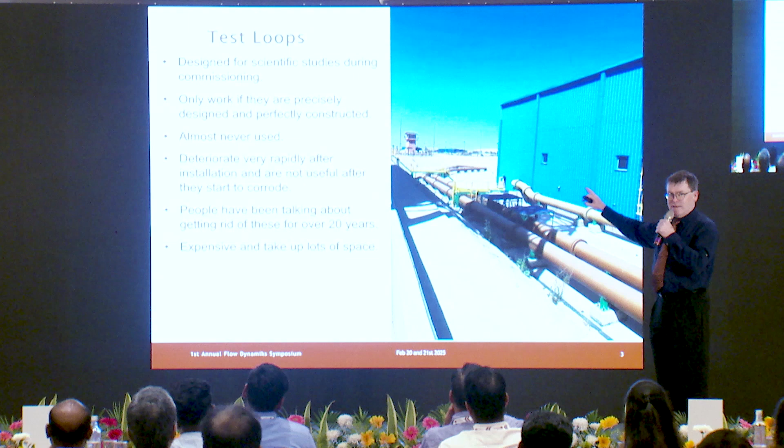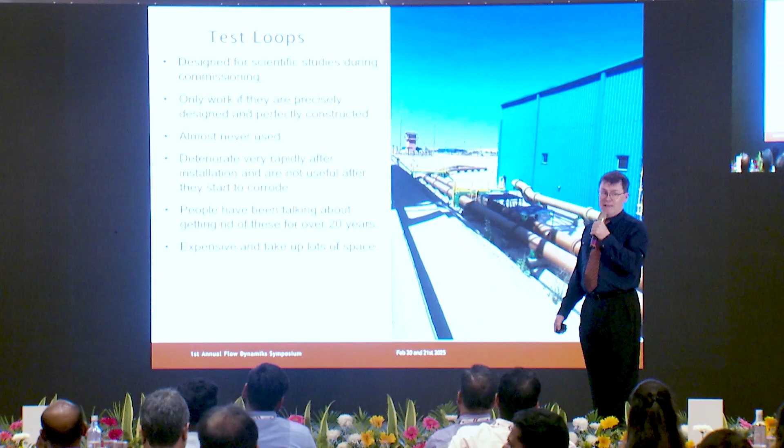The first one is test loops. So as Raj alluded to in his coal pipeline presentation, they spent a huge amount of money on the first coal pipeline to do a lot of studies at different diameters, different grind sizes, different everything. And so the first slurry pipelines, imagine the excitement of those guys if they could install a test loop right next to their pump station so they could test all the different stuff and do their studies and all of that. And that was great, but it seems to have gotten copied and pasted onto everything. So in my entire career, I've only used a test loop once, and the only thing I needed that for was for the sampling point. I've heard stories that maybe they get used a little bit during commissioning.

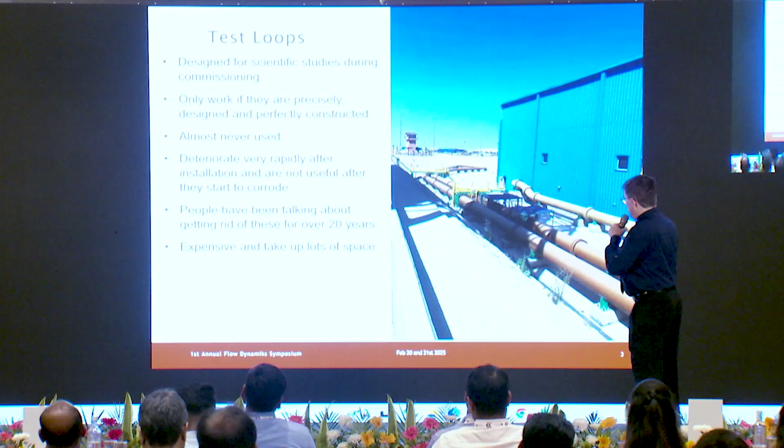So let me just run through the bullet points. So they're primarily just tools for doing a little bit of scientific study, and we've got the science down pretty well at this point. They only work if they're perfect. So I need a perfectly straight piece of pipe, and it needs to be exactly level. If it's not, then I can't use it because you're going to have a slightly different elevation, and it's going to make a problem with all of the differential pressure measurements. They're almost never used. The other problem is that they work fine during commissioning when they're brand new.

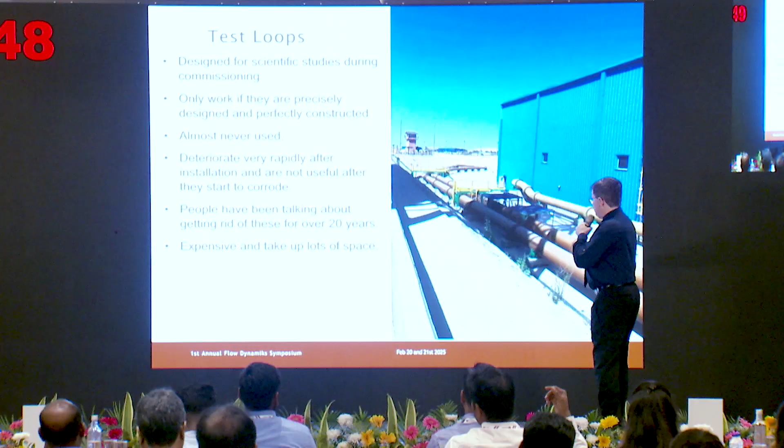The whole idea here is that this pipe is supposed to match your pipeline exactly. And the only time it matches it exactly is on day one. Because no matter what you do, the only way this could work is if you ran the slurry through there.

Do I really only have 8 minutes left?

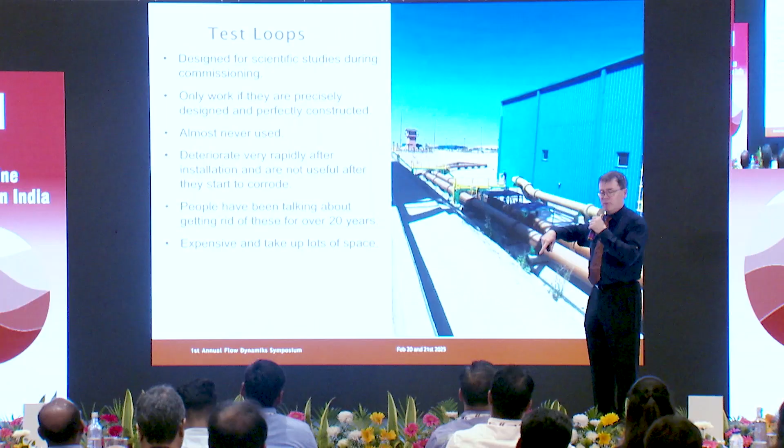Okay, anyway. The only way this could possibly work is if you ran the slurry through there all the time, because that's the only way you're going to get that test loop to wear and corrode at the same rate as your pipeline. So what happens is people use this during commissioning and then they shut it down. They either drain it, or I guess somebody might dry it out and purge it and keep it in pristine condition, but either way it doesn't match your pipeline anymore. So it's a very limited value.

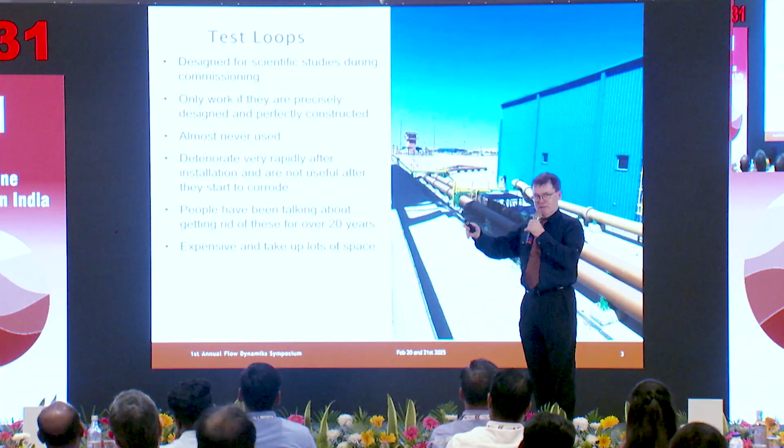And what we've found is that slurry pipelines are a lot more forgiving. Well, I shouldn't say that — we've come up with very specific specifications on slurries so that they are forgiving. We've figured out which aspects of the slurry you can relax on and which ones we have to be very strict about. And so what's happened is we aren't that concerned about off-spec slurry.

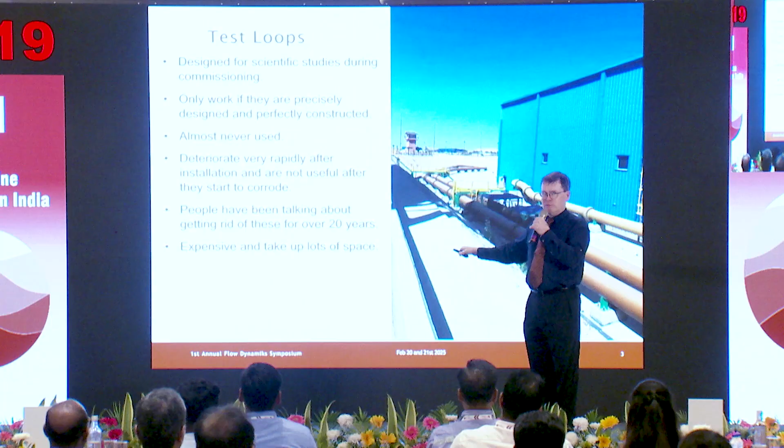We aren't so concerned that we routinely send product to the tailings pond, which I think was the original intention — that you would run it through here and say, oh, that's not going to make it through our pipeline, we're going to send that off and dispose of it or send it back to the grinding mill or something. And that really doesn't happen. I think of all the slurries I've seen, the least likely slurry for that to even happen on would be iron ore, just because of the way it's mined.

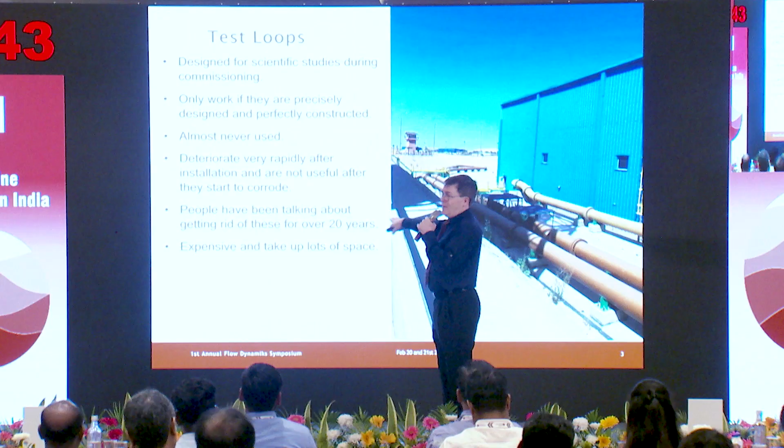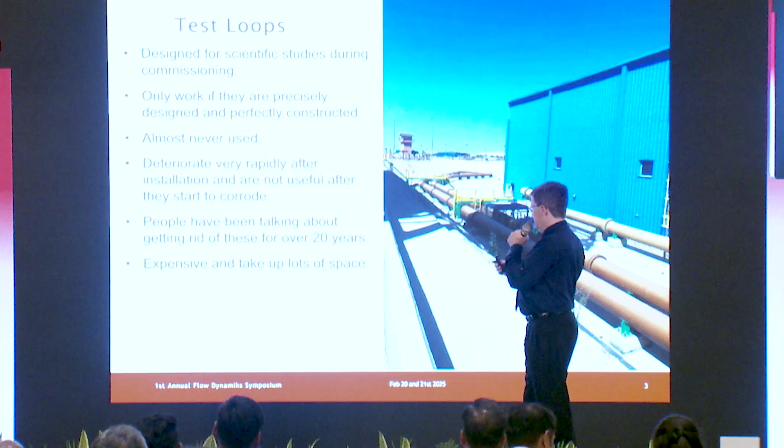When I joined PSI in 2000, there were already people saying we don't need these things. So I personally have never installed one of these on any of my jobs, ever. Now, that's not to say I've run every job that's come out of every slurry engineering company I ever worked with, so these do get installed. But you don't want these — they're expensive and they take up a lot of space. So please, I would rather not have my first test loop be at Flow Dynamiks.

Help me help you — let's not do these. And then I think the next one's really something. I don't know where this one came from: the oxygen scavenger system.

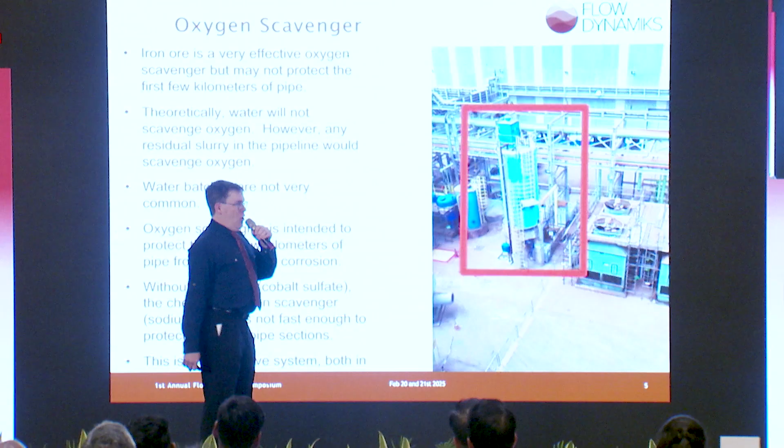We used to study these so much because we would have these copper concentrate pipelines that were almost something we didn't need to put a liner in. Liners are incredibly expensive — it changes your entire way you construct it, and you have to go back in and install it, and then it creates all kinds of other complications. Not to say I won't someday recommend we line a pipeline. But we went through this oxygen scavenger so much.

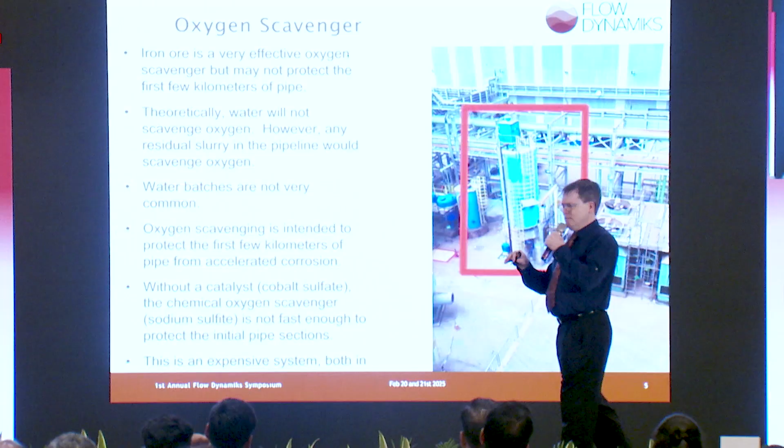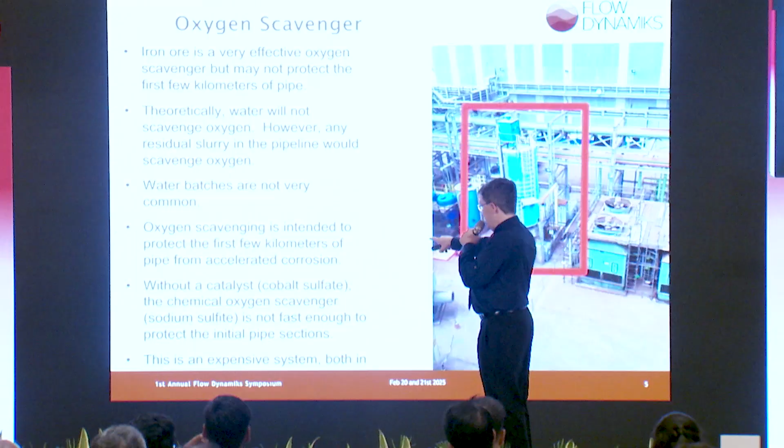The idea is if you can pull the oxygen out, then you have a lower corrosion rate. But the problem is these chemicals are really expensive. We're talking about sodium sulfite, which is the main oxygen scavenger, and then cobalt sulfate you have to add to be a catalyst, because this sodium sulfite does not scavenge the oxygen that rapidly — and all we're concerned about with the oxygen scavenger is maybe the first 5 or 10 kilometers of the pipeline.

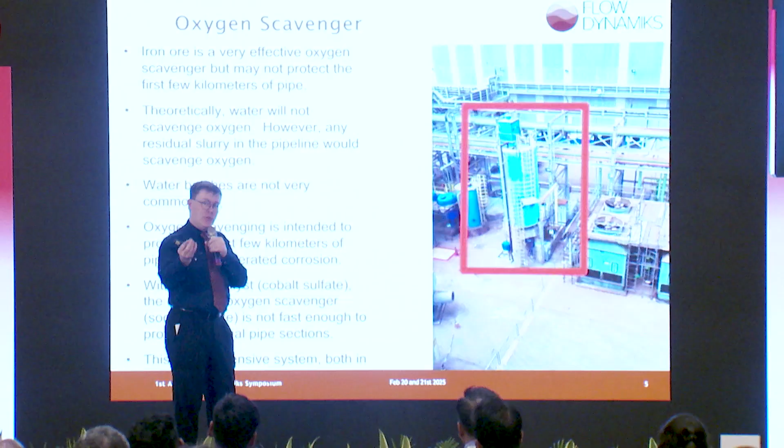The reason that's the case is because any corrosion that takes place is going to automatically scavenge the oxygen — that oxygen will not be in solution. And any iron ore is also going to tend to pull out oxygens because it still has a little bit, it's not fully oxidized in general. There's enough capacity for it to pull out a little bit more oxygen out of there.

So the whole premise behind this was for a different type of material that didn't scavenge oxygen, and it was to add it to the water itself. Now, water, because it doesn't scavenge oxygen, could potentially have a slightly higher corrosion rate than the slurry. It's very unusual, and the effect's not going to be that large.

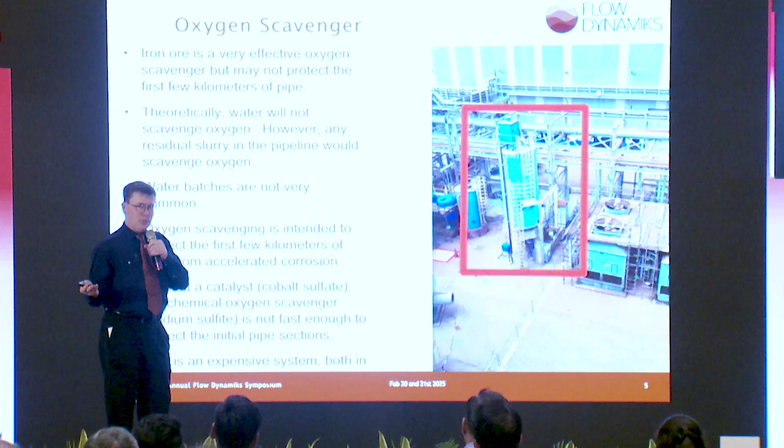But I think that must have been the case when somebody did some corrosion testing. And so the concept became to install this enormous thing — this giant tower full of sodium sulfite, a mix tank, a dosing pump, all of this — only for use on batch water and flush water.

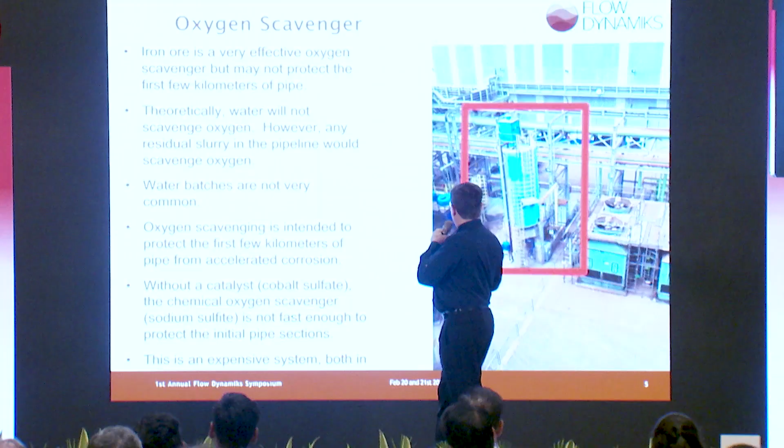And it just doesn't make any sense. I mean, from a technical point of view, I suppose I could continue to copy and paste the same exact thing into people's projects, but it makes no sense. If you really want to go that way, then you need a second tower, mix tank, and dose pump so that I can add the cobalt sulfate, which will obviously be very expensive. You don't need as much of it, but it's more expensive than the sodium sulfite.

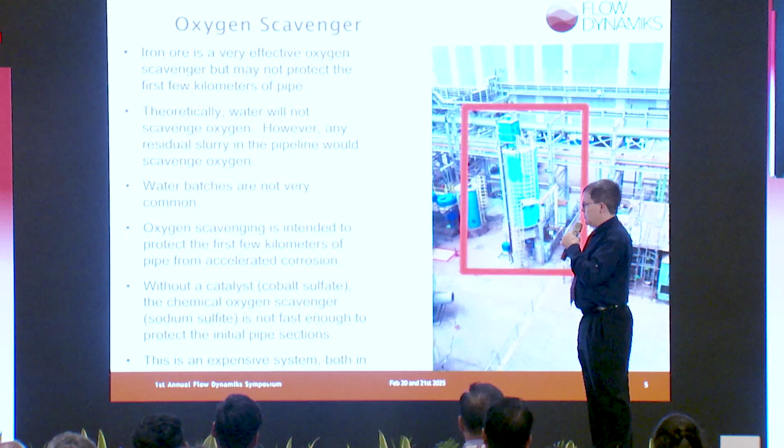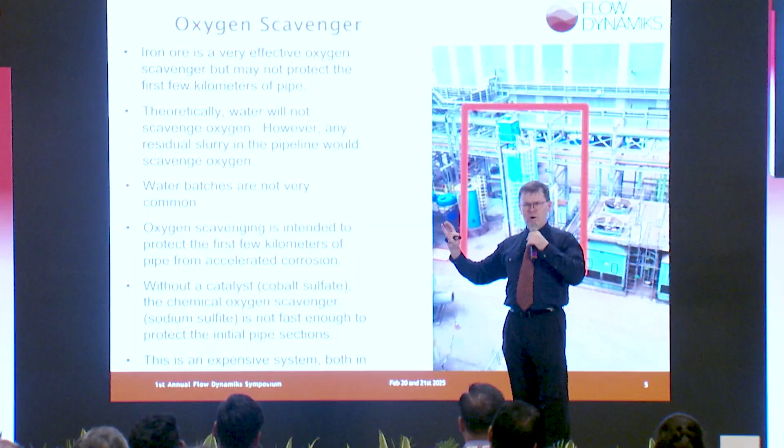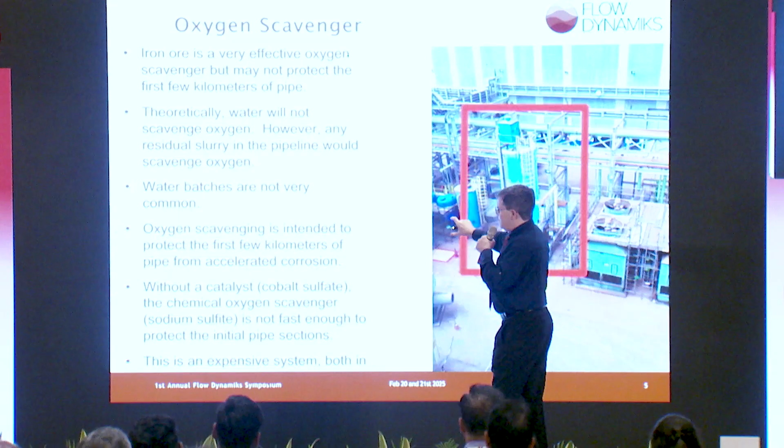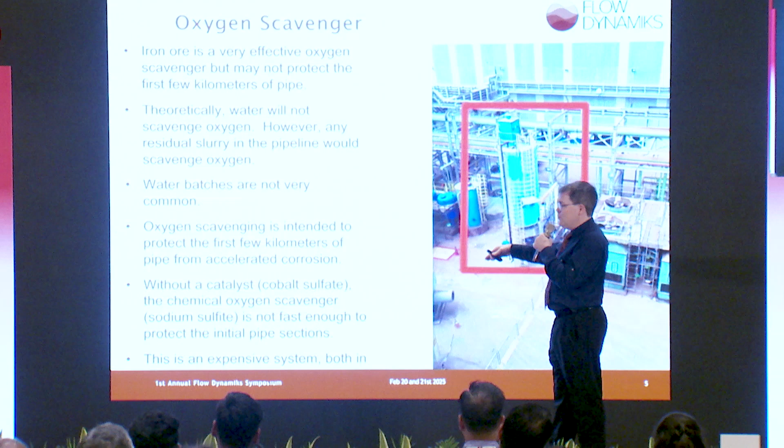So let's just run down the bullet points real quick. You don't need it for iron ore, but the water, you could say you need it for, but there's always going to be enough residual material in that pipeline that you'll have some scavenging ability. The water batches aren't that common, so even if your corrosion rate were something incredible, like 5 times higher on water, you don't run the water batches often enough for the aggregate total to matter that much. You're only trying to protect the first few kilometers of pipeline, and it's not even going to work without the catalyst. This is an expensive system, both because you have to buy all that stuff initially for the capital cost, but also because you're going to need to continually add this material, so it's an operating cost issue as well.

So I want to share a quote: there is nothing so useless as doing efficiently that which should not be done at all. Now I understand everybody wants one of these, but I made these slides up so that when we have meetings about your project, I'm just going to bring this slide. So I don't like these.

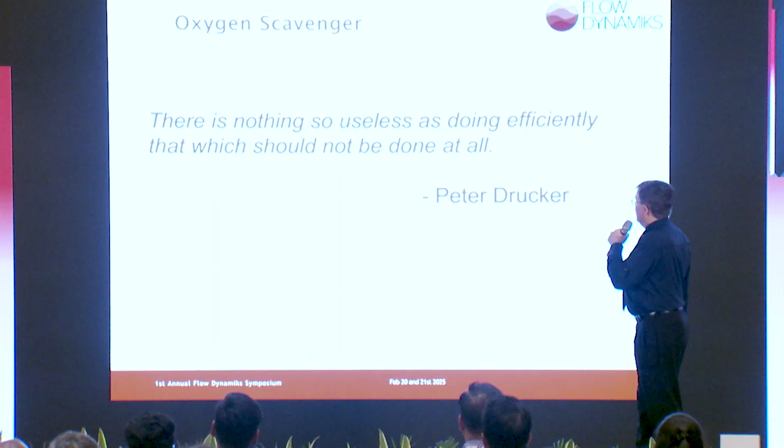So now we're going to move on to things that are a little bit less controversial. These are hydraulic accumulators. We need these to run our high-pressure slurry ball valves, essentially. They don't use motors, they're not electric actuated. We use pressurized hydraulic fluid, so one side is high pressure, one side's low pressure, and that's what turns the valve.

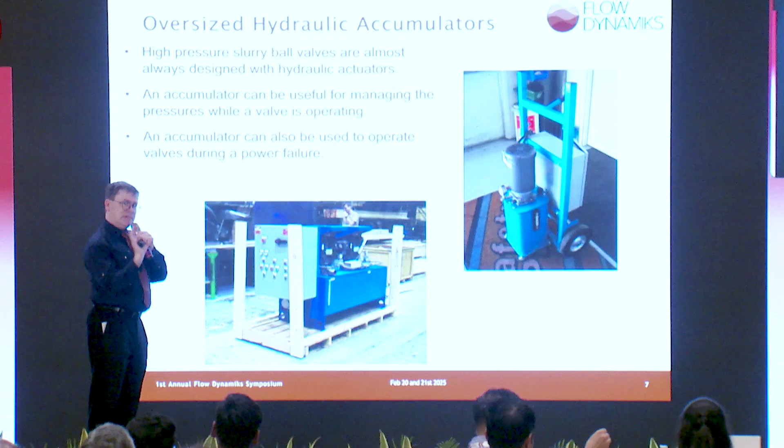The reason we do that is because you can get higher torques that way than with an electric motor. This is an issue because when the valves are sealed, there's a lot of torque required to move them out of that static condition, because you can have 2,000 psi on one side and almost no pressure on the other side. The old plug valves, we would have to inject hydraulic fluid to lift them off their seat so that you could rotate them. These, we don't do that, which is great, but it means you need a very high torque.

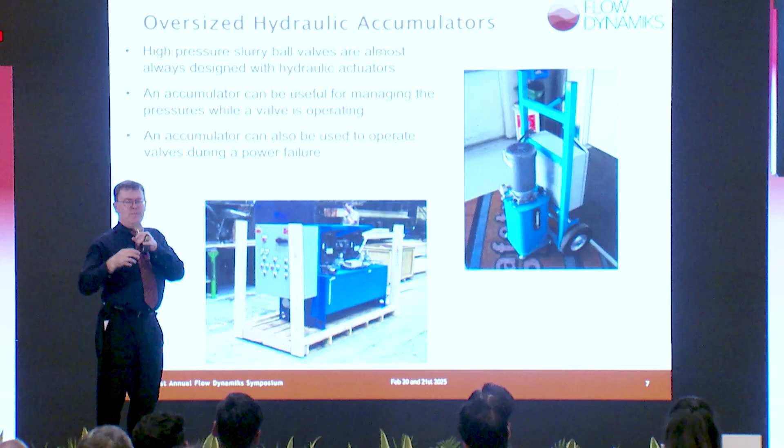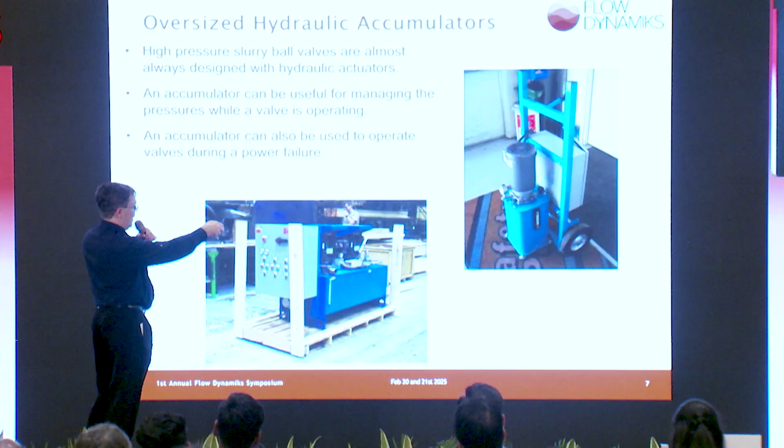In order to get that torque out of something like a motor, you'd need an enormous motor, and then you wouldn't need it after it had first rotated. So that's how these ball valves work. And these are just the hydraulic power side of it. It's got a motor here to run a pump, and then inside there you've got some hydraulic fluid that it then pressurizes, and that's a little bit bigger version of it.

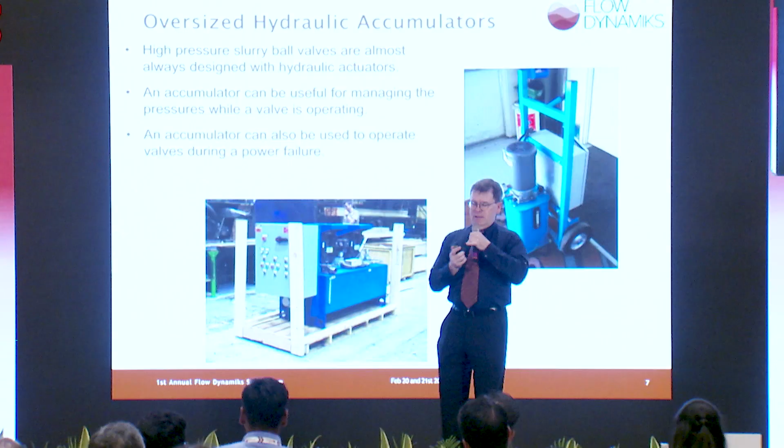But as you can imagine, when you have a very big valve and it's trying to turn, it uses up that pressure very quickly, and so these motors can't quite keep up. So the idea is to have an accumulator there that can accumulate some pressure and provide the pressure to continue moving that. We generally would want an accumulator anyway, but it would not need to be a very big accumulator. And what we realize is you can also use that same accumulator in case of a power outage, so you at least can close or open a valve in an emergency shutdown situation.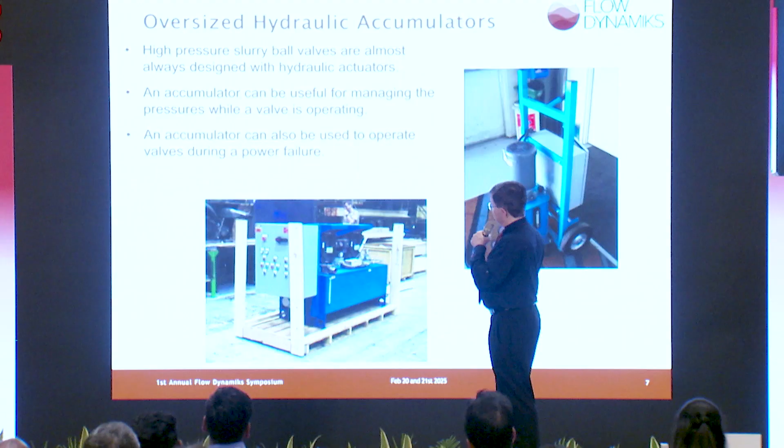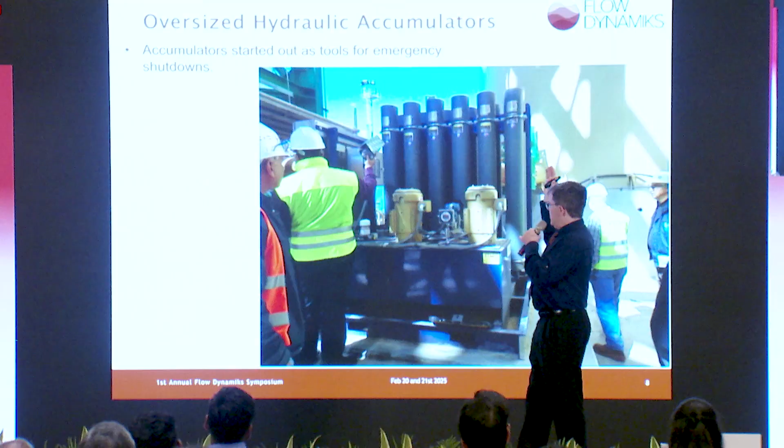So this is how they started out. Not that huge - basically half of it's just the power unit I just showed you, and then these cylinders are where we kept the pressure. This was just to run a couple of valves. In case there was a power failure and our pumps tripped, we wanted to be able to shut those valves off. So that's what those accumulators were for, and that's how we wrote the specification for the hydraulic power unit on these early jobs.

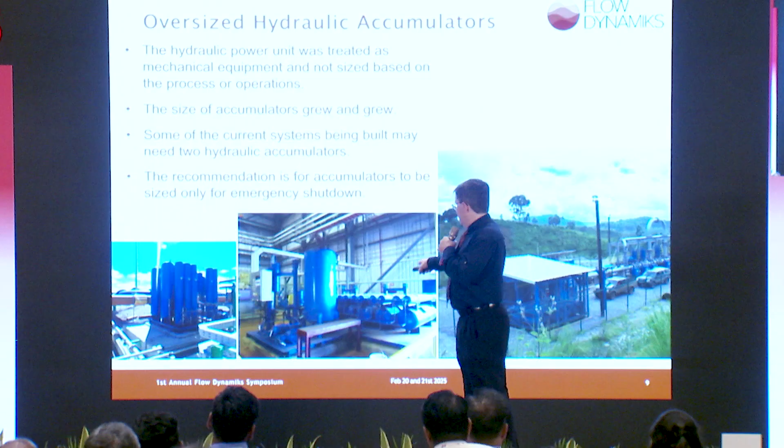It's just shut down the valves, but the problem is we didn't reevaluate that specification. So as we added more valves, and as the valves got bigger and higher pressure, the power units got bigger and bigger and bigger. I mean that's not so bad, but that's basically the size of a living room. And now we're getting up to almost the size of a house here with these cars parked next to it. On some of the more recent jobs, we have to have two hydraulic power units because they're just enormous accumulators, enormous valves, and all of this. It's getting out of hand.

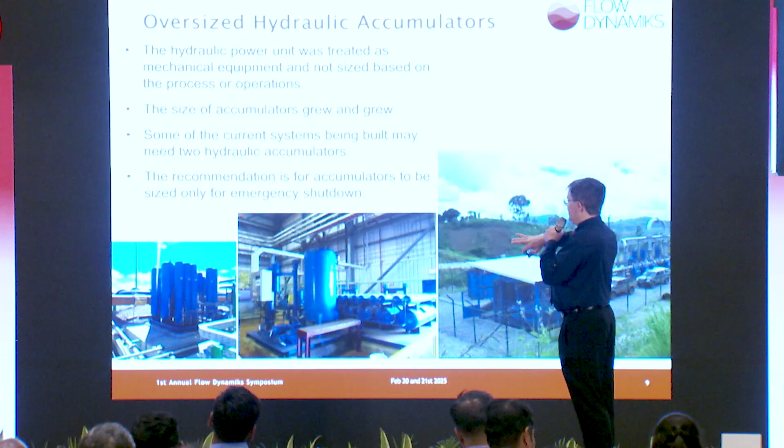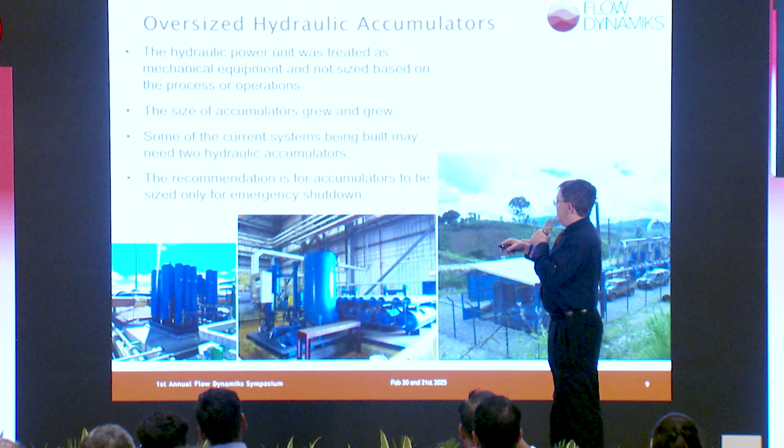So nobody in the past dealt with the hydraulic accumulators. The issue was never considered a process issue. We just wrote in there that you have to be able to stroke all the valves a couple times with no power, and nobody really looked at what we needed in an emergency shutdown situation. So these just gotten bigger and bigger and bigger.

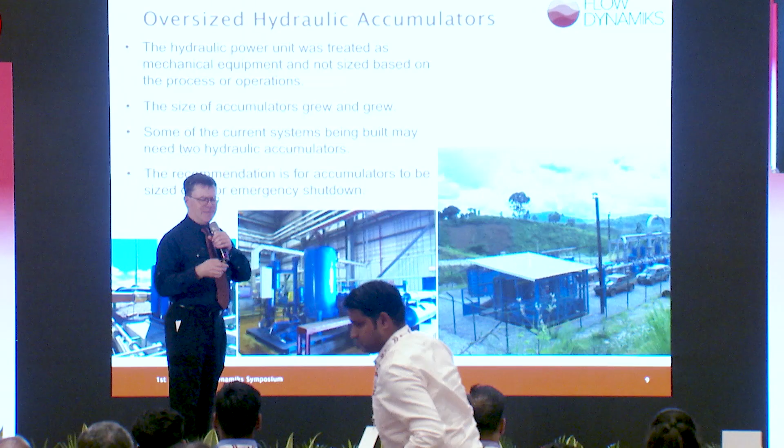I think moving forward in the future, we're going to have to take a look at what we really need, because we don't need hydraulic accumulators for pig launchers. We don't need accumulators for a lot of changes at choke stations and things like that. In the case of a shutdown, you're just going to leave everything where it is. So that one I think isn't going to be as difficult to implement as the other two. But still, I wanted to let everyone know, because this is going to change the look of some stations.

So this is a little bit better news. These aren't useless things. These are things I think we can improve on that are fairly easy to do moving forward, but still are going to represent a change.

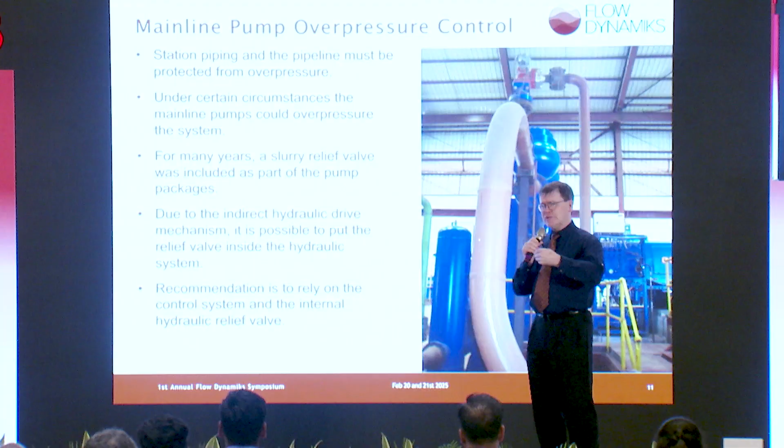When I first started, we were using flushed plunger pumps and piston pumps, and they had just come out with these piston diaphragm pumps that we're using today. So a piston pump or a flushed plunger pump has physical contact from the piston to the slurry. And so if something happened, if you closed a valve downstream, or if there was some kind of pressure problem, that pump could continue to run and overpressure the station piping or the pipeline. And so we had to have pressure protection, and that was this valve here.

It's a pressure relief valve that would be set well above the pump discharge pressure to protect the station piping. But a few things, because you couldn't put a pressure relief valve on a piston rod. But what's happened is, now that we have piston diaphragm pumps, the piston is no longer in direct contact with the slurry. There's a hydraulic fluid in between there. And so the idea is we can take advantage of the hydraulic fluid and put the relief valve inside the pump to relieve the pressure inside the hydraulic fluid rather than outside, which causes a lot of issues.

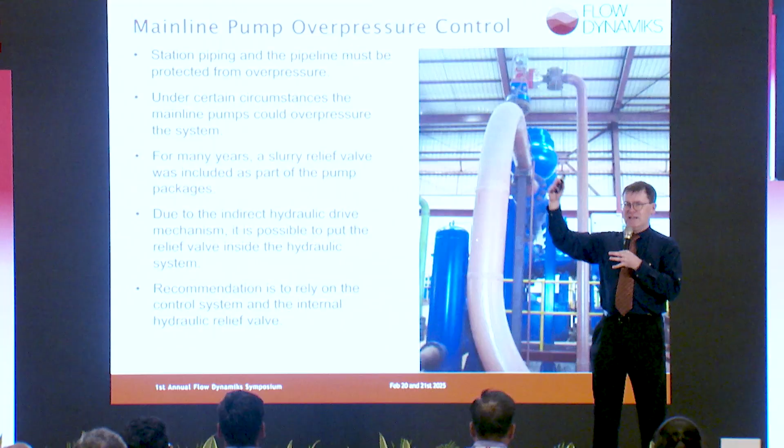The main issue we're running into these days is that we are trying to operate the pump so close to the maximum pressure, so close to the pressure rating of the flanges, so close to the pressure rating of the entire station, that there isn't really enough extra pressure available to get that 20%, to get us away from nuisance bursts on these relief valves.

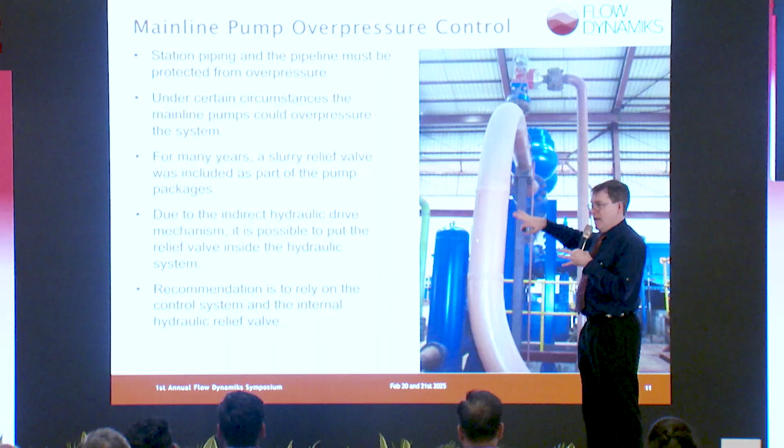So I haven't cleared this with all of the pump vendors. I probably should have, but I think our goal in the future is to try to rely more on the internal hydraulic relief valves and eliminate these external relief valves as much as possible. They're rarely used, and they create some other problems with the design, as I'm alluding to.

One of the more recent jobs, we got rid of this, and we had very few options on how to install that if we wanted an external slurry relief valve, because there just wasn't enough extra pressure, especially once you consider the natural pulsations of pressure coming out of this pump. We were worried about nuisance bursts.

So I think that covers all the bullet points. I had these bullet points here in case we have to come back to them at some future meeting.

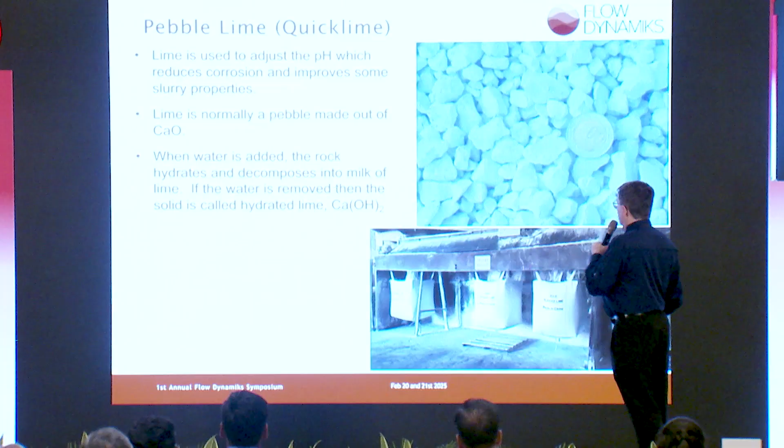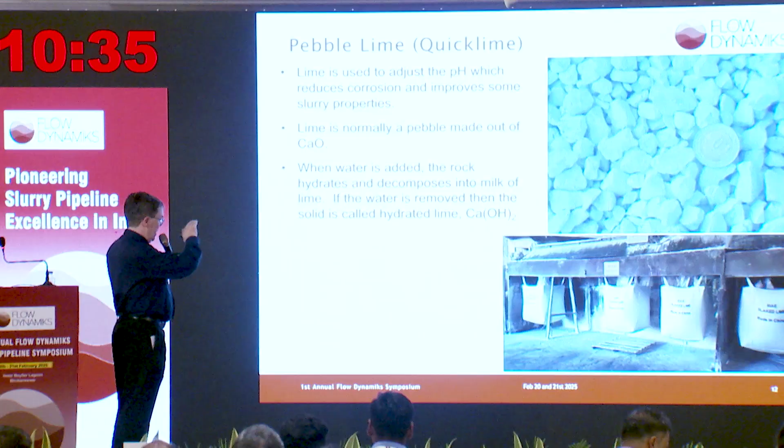All right. So lime we use to control the pH of slurry. As we get to high pHs, it does a couple of things. But the main one is that when you have a high pH, it limits corrosion rates. And it also has some beneficial effects on the slurry itself. But in order to do that, we need a cheap source of, essentially, to raise the pH, this lime material.

So lime starts out as calcium oxide. And that's this rock-like material here, sort of like a gravel size. But the issue with that is when you add water, it releases a lot of heat, and it also has some grit in it and some other things that may be undesirable.

So there's a whole process. You turn this rock into what we call milk of lime, which is a lime slurry. Lime is not very soluble in water, so it's like a white slurry almost. If you take that milk of lime and you remove the water and you dry it back out, you get what we call hydrated lime, which goes in bags like that and can also be transported by truck and other ways. It's a lot less expensive to buy the lime itself.

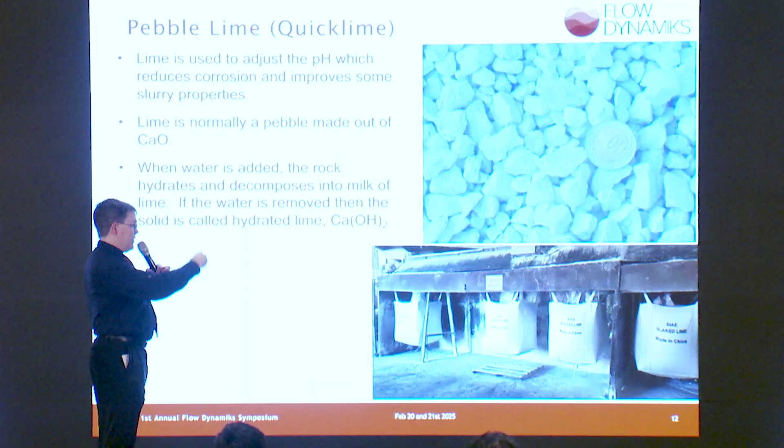The hydrated lime is more of a finished chemical process, and just removing the water takes a lot of energy, especially since we're just trying to turn it back into milk of lime. So my preference, especially since these are big pipelines that use a lot of lime, is just to go ahead and install the slaking system so that we can handle the large lime rocks. The other problem with the powders is that if you get them wet, they tend to clump together and cause other issues of that sort.

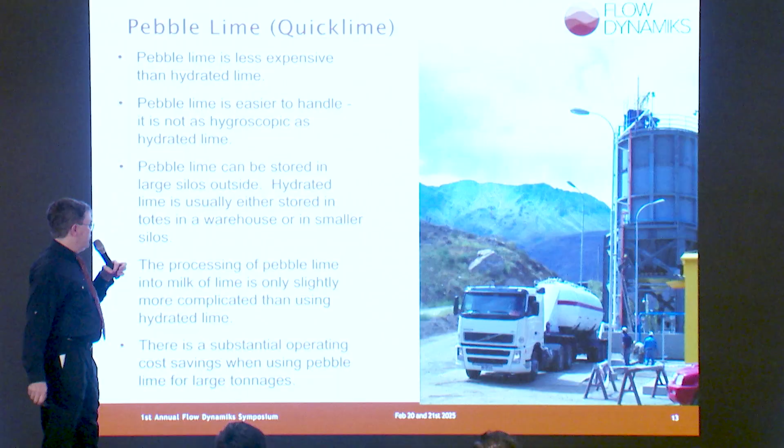One of the nice advantages of pebble lime is that you can store it in very tall silos because it's more of a rock. If you wanted to store the other material, it would need a smaller silo for sure, and often you want to keep that inside too because the moisture is a pretty significant problem. It is possible to handle hydrated lime, and I accept some people may choose to do that, but I don't think the economics are there to justify it, especially since in most cases we're using a lot of this, and it's an operating cost issue. Just something to keep in mind. That's my position, but I know some clients have strong opinions on this, and I wanted to take a minute to talk about it.

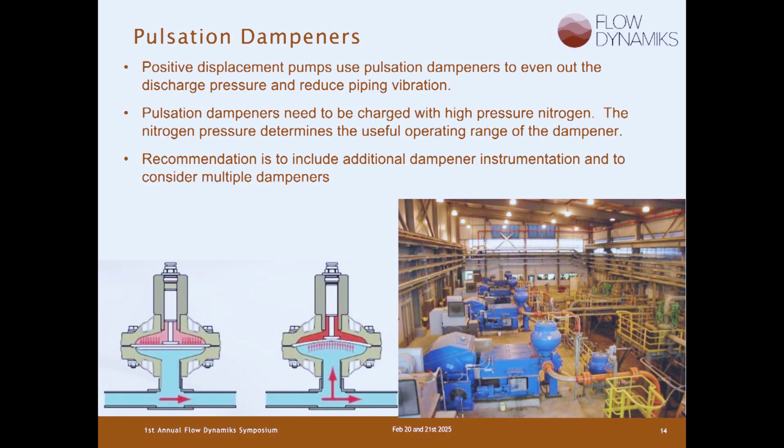On these piston diaphragm pumps, obviously there are a lot of pulsation issues. Essentially, a piston diaphragm pump is a couple of check valves. The check valve slams open and closed, and that's where you get your pressure from. You have various pistons pushing these check valves, and they're slamming open and shut, so you get a lot of pulsation coming out of these pumps. We put pulsation dampeners on there to help minimize and smooth out the bumps.

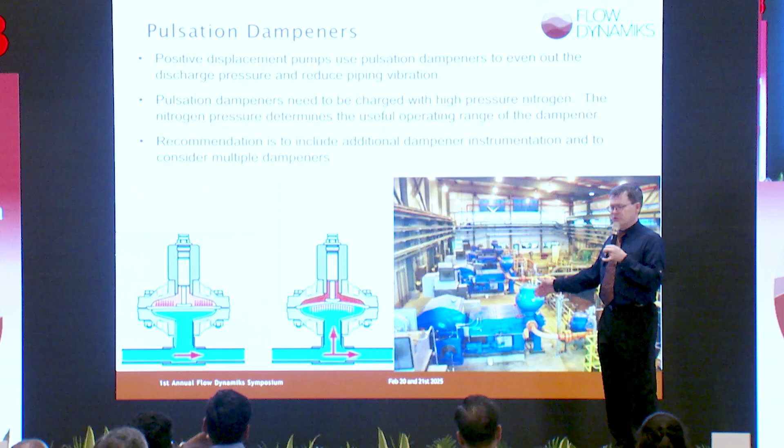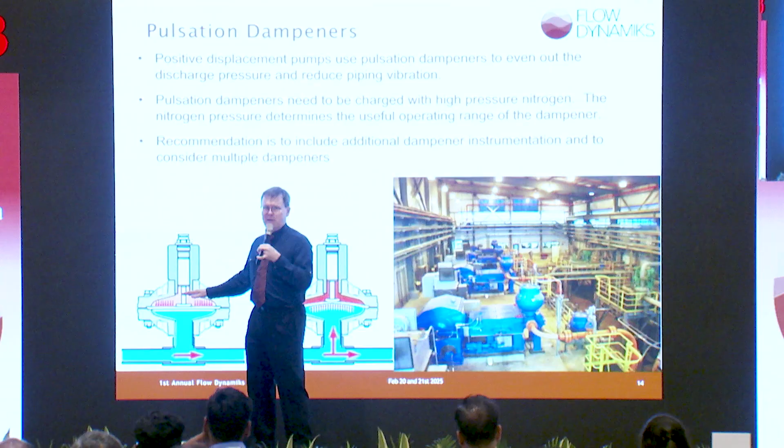The way these are typically designed, they ship without any nitrogen in them, so they can't actually do anything because there's no pressure. If you imagine this red part here, when it's shipped from the factory, it's pressed all the way up and there's no nitrogen. We call that the pre-charge. If there's no nitrogen in there and you tried to use it as a pulsation dampener, it wouldn't do anything - this diaphragm would just be pushed to the top all the time. You can inject nitrogen in there and push it down, and the pressure of your pre-charge will determine what pressure range this dampener will actually work at.

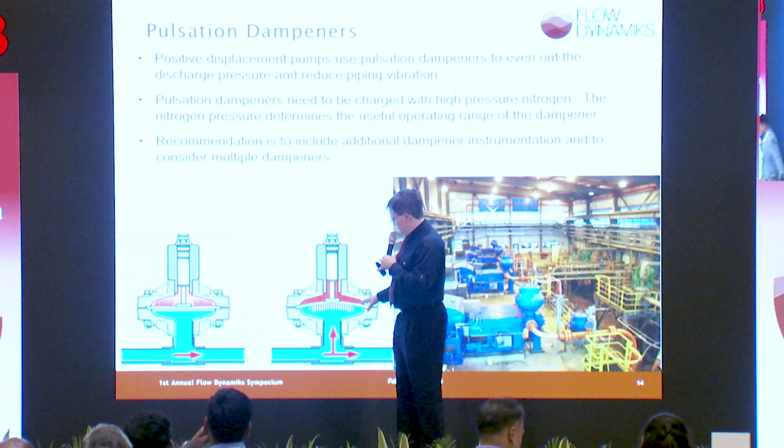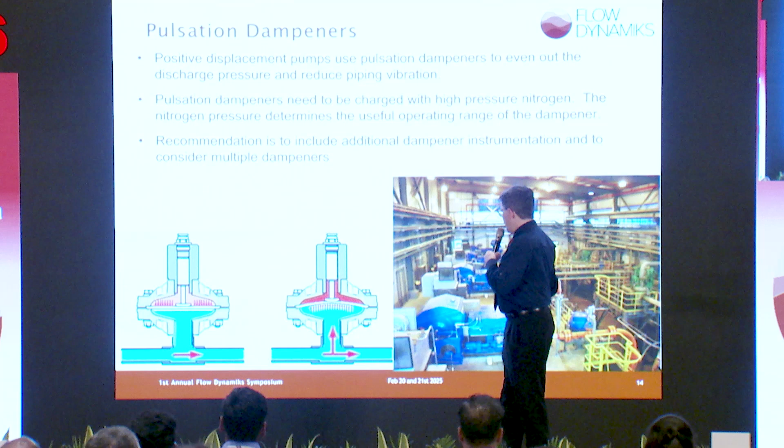The main issue, though, is that we normally don't have any idea where this diaphragm is. Is it at the top? Is it at the bottom? We don't have any idea. We don't have any way of checking the pre-charge easily. And think about this - it can be very high pressure here, so your pre-charge could be very high, and there's no pressure gauge on it. So it's not easy. I've been to a few sites where I'm not even sure if there has been any nitrogen put into it, or if someone just forgot to add it. And obviously there's a lot of pulsation.

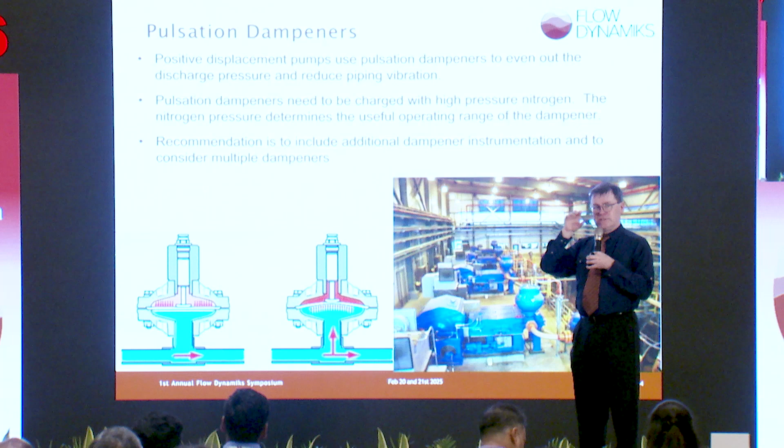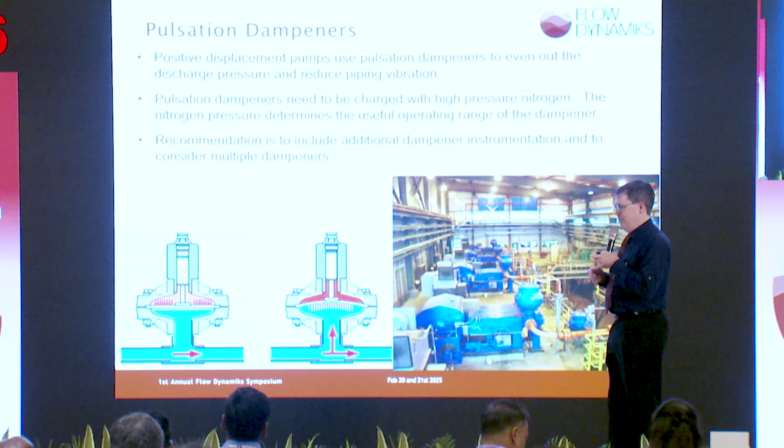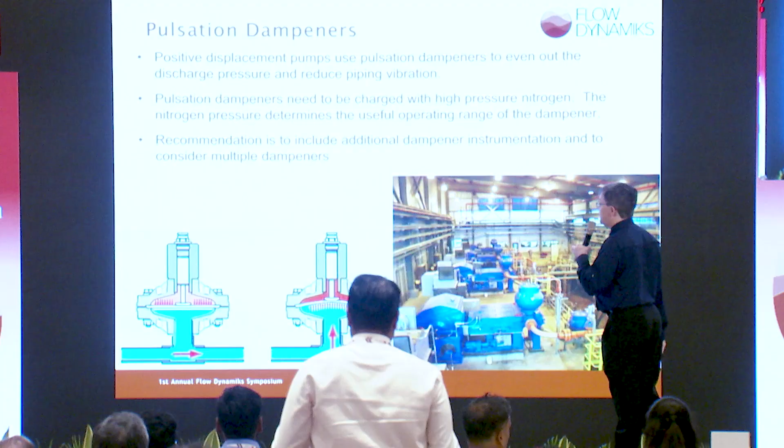These are not very expensive in the grand scheme of things, and what we've started to do on some other projects is install multiple pulsation dampeners - 2, sometimes 3, to cover a better range of pressures. At the same time, you can select your nitrogen pre-charges for each of them and potentially adjust them based on where your system's operating. If we add a pressure transmitter to the SCADA system, among other things, this is a fairly low-cost change, but instead of one large pulsation dampener, we're probably going to end up with 2, or if you have a very wide flow rate or pressure range, maybe 3. We also want to tie this back into SCADA so operators can see how these are operating, to make sure they're actually working as pulsation dampeners. That's another example of something I think we can do better moving forward, so expect to see that on upcoming designs.

I don't know how late we are, but I'm definitely going to finish on time.

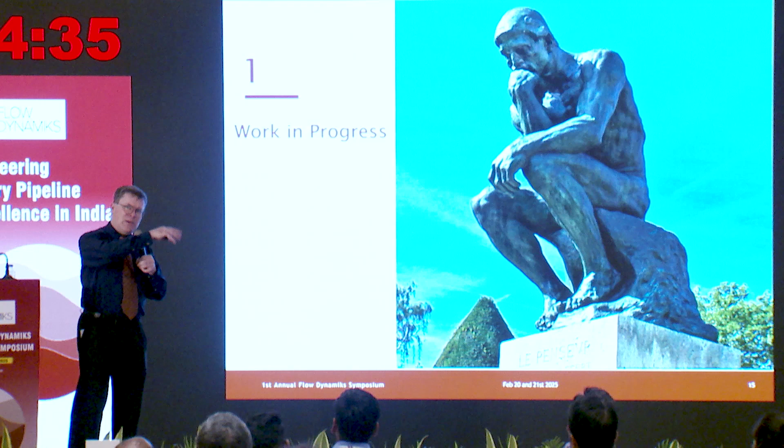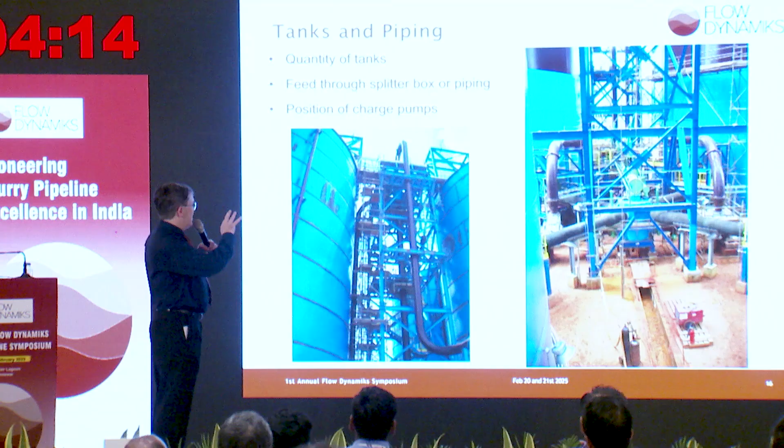A lot of people have this perception that I can just design a system in a few days, that I just copy paste the previous job and it's super easy. But the truth is there's a lot of stuff that needs to get thought about, and the next 2 examples, I think, are places we're going to be spending a lot of time on in future designs. One of the biggest issues I have is how the pump station tanks are being designed. There's a question of how many tanks we need, because as an operator, I think it's pretty difficult to justify having more than 2 tanks, because I would normally operate the pump station at least...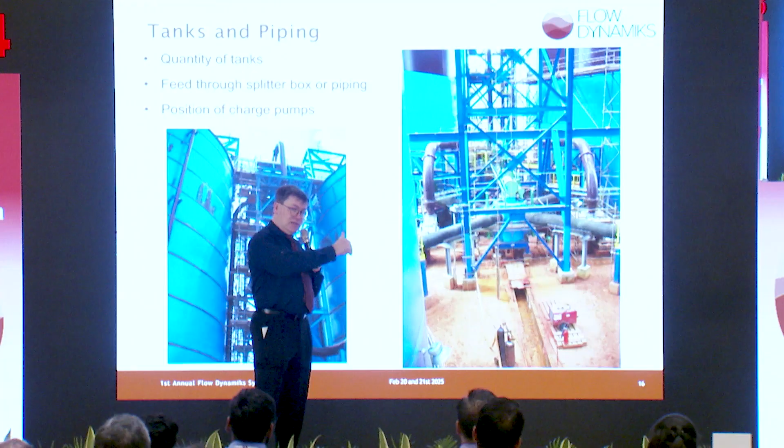I would have all the flow going into one tank, and I would try to hold that tank's level at about half full, and that should do it. I have the other tank there as a backup, but I'm seeing some systems getting installed with 4, 6, 8 tanks, and there are some cases where that's made a lot of sense.

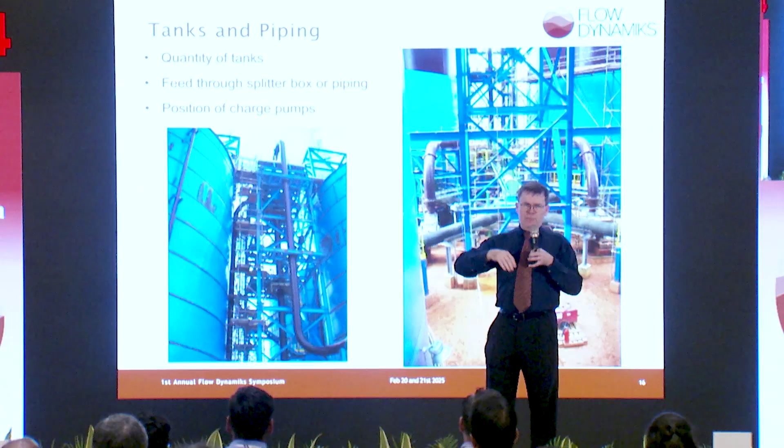We've had several multi-product pipelines where they had different grades of ore, or different types of ore, that they really wanted to keep separate. So if you got one ore, you'd send it to tank A. If you got the other ore, it would go to B. You'd wait until a tank was mostly full, then run a batch of that, then put a water batch in, then switch to another tank. So there are certainly cases where you need a lot of tanks.

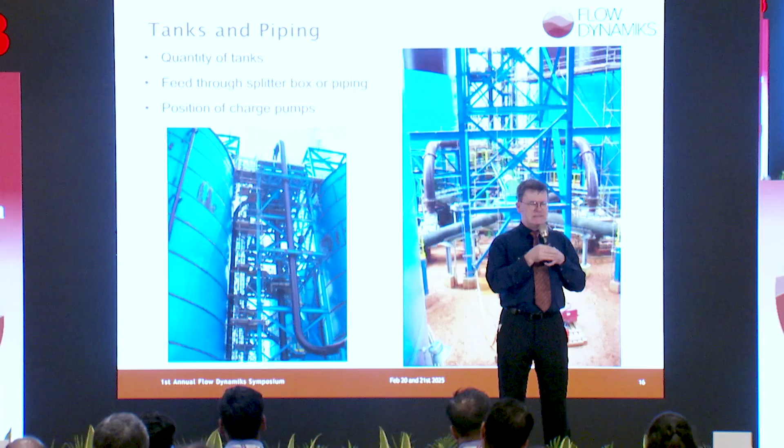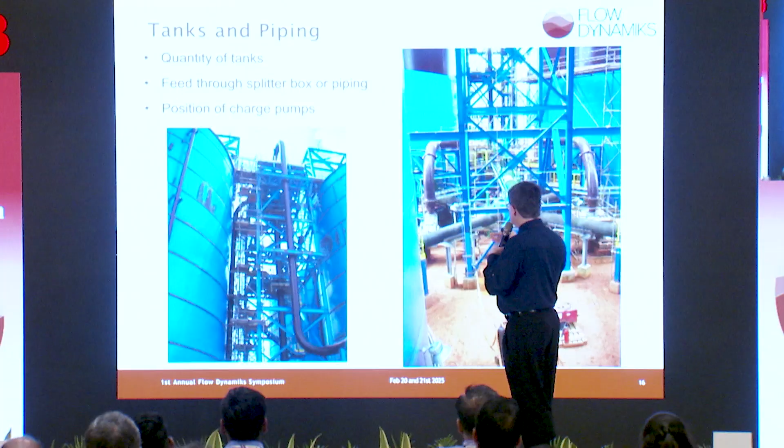I think the intention behind putting in lots of giant tanks is that it gives you autonomy. But my question is, the agitators on these tanks use a lot of power. If all you have is one ore grade, are you really going to ever run all 4 tanks full? Because you're going to be paying for all that power. Yes, it's true that if you had all 4 tanks full and they shut down the mill, you could continue to pump for a long time. But I think this needs some serious analysis and consideration, and I'm not sure a lot of time is spent on this currently.

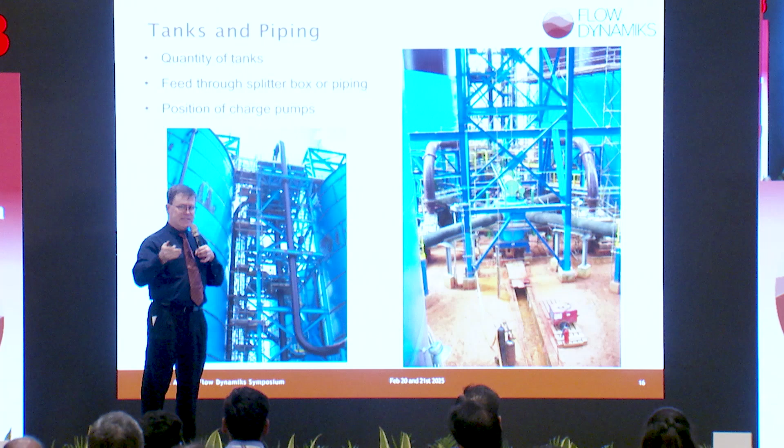We also generally send all the slurry to a splitter box up here, and part of the reason for that is when we have a lot of different products and need to switch between tanks. But if all you have is a couple of tanks, or even 4 tanks, you don't necessarily need a splitter box. I can handle it all with valving through a manifold at the base of the tanks.

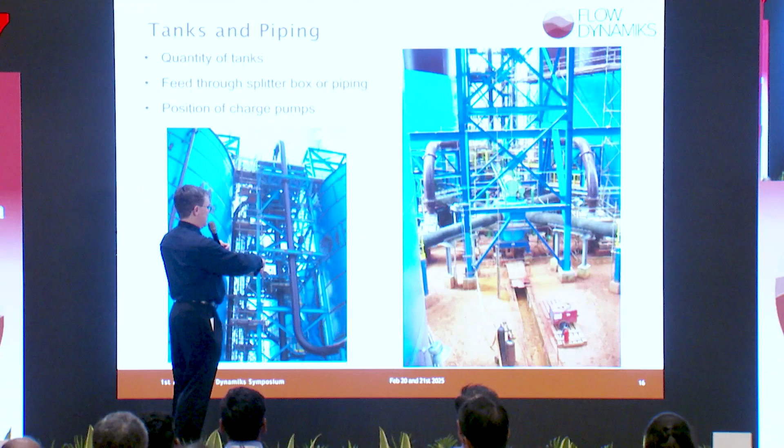I do think there's a question of whether we really want to stick with that elevated design, because as soon as you do that, you need quite a complicated support system, and you're running pipes vertically through all the supports, and it causes some design concerns for me. So I think that's worth talking about.

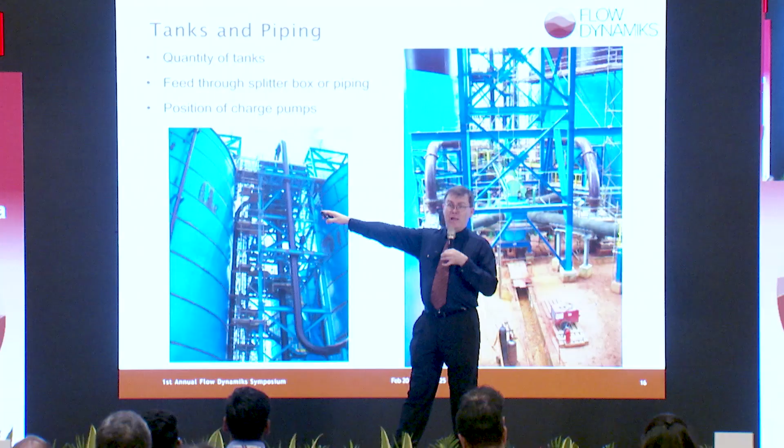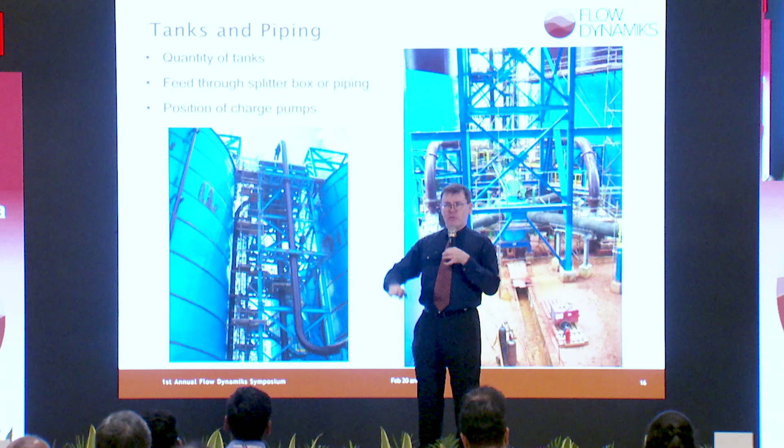And then also the position of the charge pumps. Charge pumps are designed to have very short suction runs, and you can get away with a lot on these because you have such high tanks. If the tank is full, you can afford to have your charge pump way off in the distance because you have all that extra pressure running behind it. But if you want to drain that tank, run it all the way to the bottom, which is generally something we like to be able to do, you want to have those pumps as close as possible.

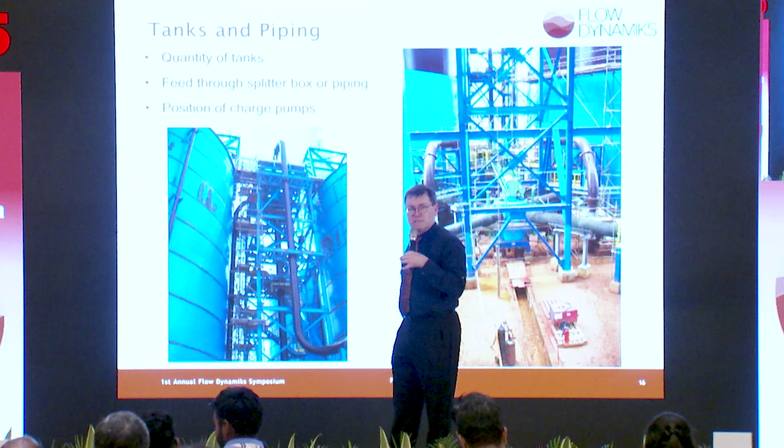Here they put the pumps basically inside the tank area. I think there are a variety of ways we can handle it, but these are just topics that need to be developed and talked through, because I don't think just copying and pasting previous jobs really does it. I don't think we have the perfect solution yet. Also, the way you combine the flows is an issue. I don't think anybody's come up with something that's perfect on that. So keep in mind that the tank area at the pump station is very much something we're still working on, still trying to find the ideal solution.

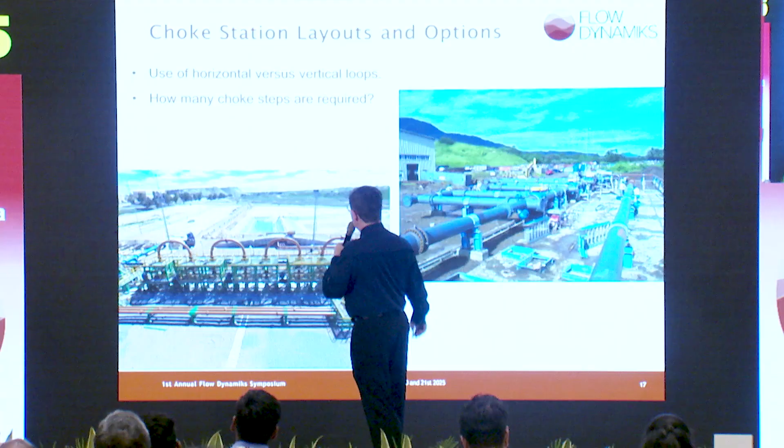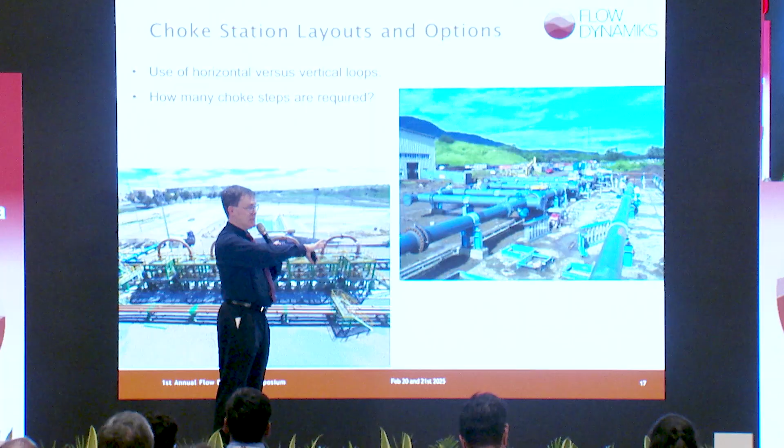And then also the choke station layout. We started with vertical choke loops for very specific reasons, because we wanted pretty small choke steps, but it's also possible to put them on horizontal, which might be more desirable in some cases. So this is something worth talking about. There are pluses and minuses to each.

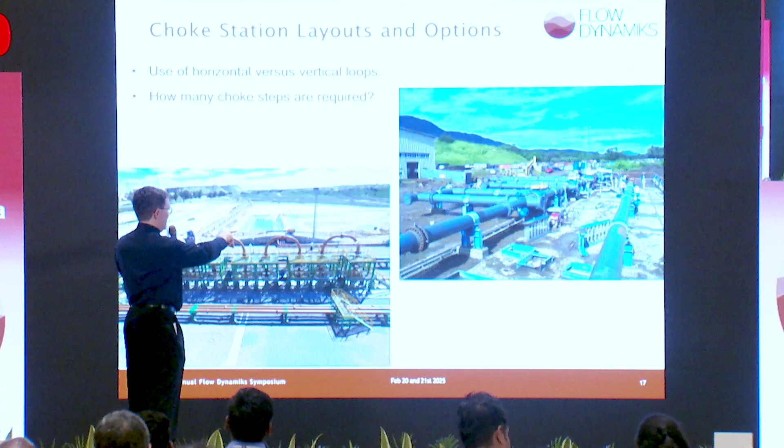And then also, how large of a choke step can we accommodate? Because if we need small choke steps, the benefit is that you waste less power. You can get closer to the perfect amount of dissipation. Larger choke steps mean usually you're going to have to use up a little bit of extra pump power. But if there's a strong goal to minimize the size of the choke station, we can potentially eliminate one or even two of the loops, and make it horizontal, and come up with a more efficient design. So I guess I had to rush through that a little bit, but I'm happy to talk about any of those topics at more length another time.